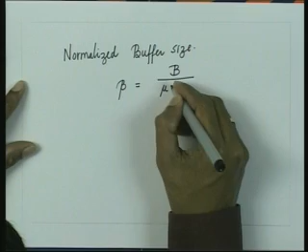So let us define the window evolution. Let us define the normalized buffer size beta, defined to be B upon mu tau plus 1. So this is the normalized buffer size.

Let us define T to be equal to tau plus 1 upon mu. So this is the propagation delay, and this is the service time. So this is the total round trip time. T therefore denotes the round trip time. So this I can write to be B upon mu T, where mu is the service rate and T is the round trip time.

So this is the delay, and this is the bandwidth. So if beta is less than or equal to 1, that means we have the case of a large bandwidth delay product.

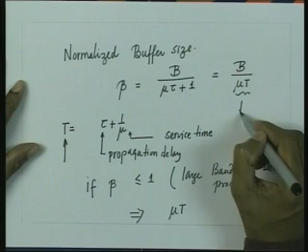Essentially it means that the bandwidth delay product, this mu T, is greater than or equal to the bottleneck buffer size. We would like to analyze the throughput characteristics of a TCP source in networks having large bandwidth delay products. By large bandwidth delay products, we mean that the product of the bandwidth into the delay, where the delay is the sum of the propagation delays plus the service time, is greater than or equal to the buffer size, that is, greater than the bottleneck buffer capacity.

Now let us try to analyze such networks which are having large bandwidth delay products.

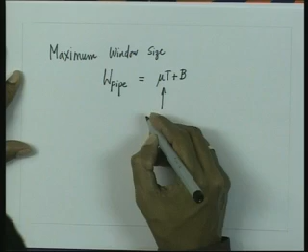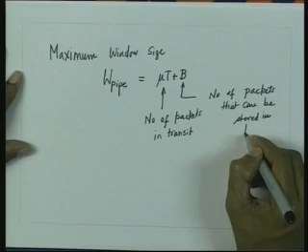Now the maximum window size that can be there, we call it W pipe, the maximum window size, or W max, will be mu T plus B. This many number of packets can be in transit, and these many number of packets can be stored in the buffer. So this is the maximum window size in the network. That is, the maximum window size denotes the maximum number of unacknowledged packets that can be there in the network, which equals the number of packets in transit plus the number of packets queued up in the buffer. So mu T plus B indicates the maximum number of unacknowledged packets that can be there in the network, and therefore by definition it will be the maximum window size.

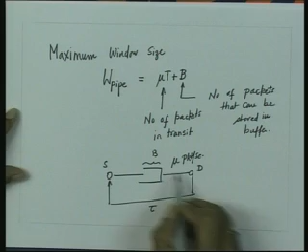Now let us try to see how the window evolution takes place during the slow start phase; things will become clearer. The situation is something like this: there is a source, a bottleneck buffer of size B serving at a rate of mu packets per second, with a propagation delay of tau, serving packets toward the destination with propagation delay tau. This model is a very simplified model of the TCP connection between a source and a destination in a large bandwidth network.

Our assumption is that the source always has data to send, so it is an infinite data source. The propagation delay is assumed to be constant; usually in practice it may not be, but here it's assumed constant. There is only one single bottleneck node, and that node has a capacity of holding B packets, with a service rate of mu packets per second. Now let us try to see how the window evolution takes place during the slow start phase.

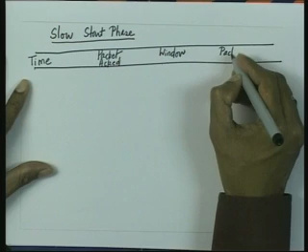Now the window evolution that takes place in the slow start phase is something like this: we track time, the packet which has been ACKed, window size, packet number, and queue length. At time 0, window size is 1 in the slow start phase.

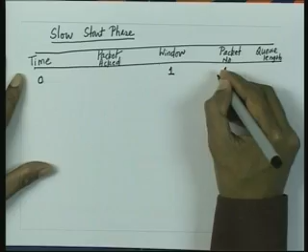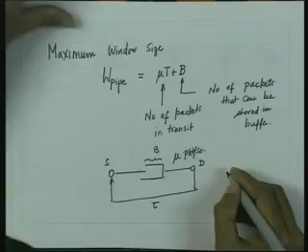So we release packet number 1, and the queue length shows that packet going into the buffer and sitting there, so queue length becomes 1. After t time units, at time t, note that this t consists of tau plus 1 upon mu, that is, the propagation delay plus the service time. So when packet 1 has been released here, after time t, the packet that gets acknowledged will be packet number 1, and when this packet is acknowledged, the window size becomes 2. Then we release packets 2 and 3, and these two packets go into the buffer and sit there.

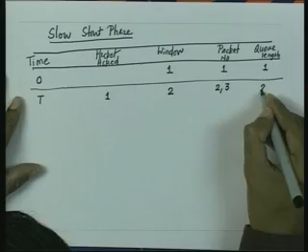So what is happening during the slow start phase? Initially we start from window size equal to 1. We release that packet. When that packet's acknowledgement comes back after a round trip time, denoted by capital T, the window size now doubles, becoming 2. For every acknowledgement, the window size increases by 1 in the slow start phase. So when this packet's acknowledgement comes back, the window size becomes 2, and we release the 2 packets, which go and sit into the buffer.

Now if you see packet number 2, which was released earlier, when that gets serviced after a time interval of t, that means at time 2t, the packet which gets acknowledged is packet 2. Now when this packet comes here, packet 3 actually starts getting service.

So the window size now becomes, when packet number 2 has been acknowledged, the window size becomes 3. Already 3 is there in transit, and therefore we can now release packet number 4 and 5, and since 3 is there in transit, these two packets will go and sit in the buffer, and therefore the queue length is again 2.

Now the acknowledgement for packet number 3 will come back to the source after another interval of 1 upon mu, because the difference between 2 and 3 will be 1 upon mu, where 1 upon mu is the service time. The packet that gets acknowledged is 3, and when that happens, the window size becomes 4.

Now when the window size becomes 4, at this point when 3 was in transit, packet number 4 was getting served, and since the window size is 4, packet number 5 is already there in the buffer, so we can release packet number 6 and 7. So 5, 6, 7 will be there in the queue, so the queue length is 3, and 4 will be there in transit, and therefore the total window size is 4, which indicates the maximum number of unacknowledged data that can be in transit.

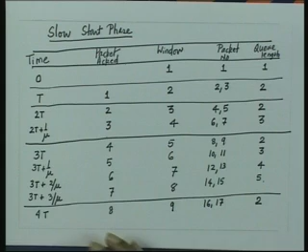So you can see here at time 4t, the acknowledgement for 8 comes, the window size becomes 9, and you will release packet number 16 and 17. So the window size is 9, the acknowledgement for packet number 8 has come, and note that all the packets, that is 9, 10, 11, 12, 13, 14, they are all in transit, and therefore the queue length again will be 2. So this illustrates the exponential nature of the window evolution.

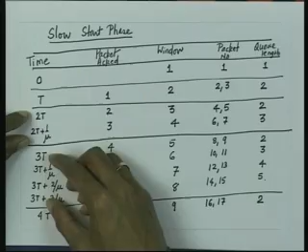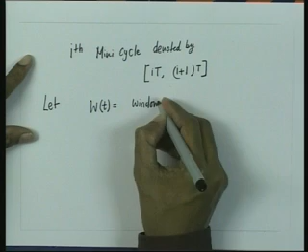Now let us define each of these intervals, t and this interval and this interval, to be the minicycles. So we define the ith minicycle to be denoted by i into t. Now let us say that W(t) denotes the window evolution, the window size at time t. Now if you observe the behavior here, this is the first minicycle, the second minicycle, the third minicycle, the fourth minicycle, and so on.

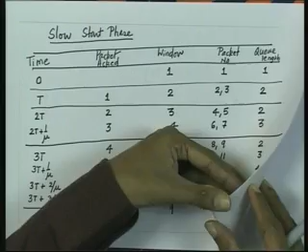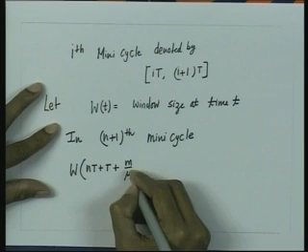So if you see that in the n plus 1th minicycle, the window size W at nt plus t plus m by mu is given by 2 raised to power n plus m plus 1, for m lying between 0 and 2 raised to power n minus 1.

Or in other words, if you see in the nth minicycle, it will be W at nt plus m by mu, which will be equal to 2 raised to power n minus 1 plus m plus 1, for m lying between 0 and 2 raised to power n minus 1.

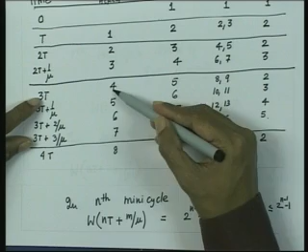So as you can see here, let us say n is equal to 3, and if m is 0, the window size is 3 minus 1, 2 raised to power 2, that is 4, plus 1, that is 5. If you take 3t plus 1 by mu, that is m is 1, then it becomes equal to 5 plus 1, that is 6, and so on.

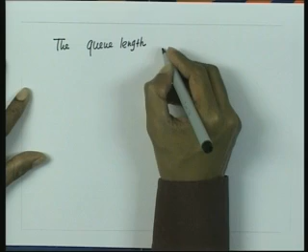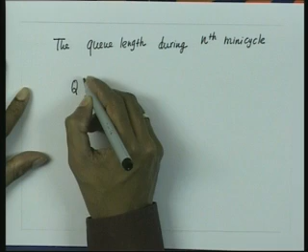This way you can determine what will be the window size at the nth minicycle. Similarly, the queue length during the nth minicycle is given by Q of nt plus m by mu, which will be equal to m plus 2, for m lying between 0 to 2 raised to power n minus 1. So this is the queue length.

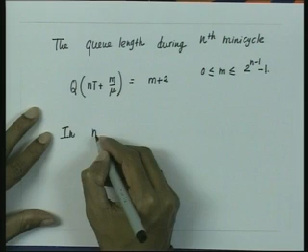Now if you see from here, in the nth minicycle the maximum window size will be when m achieves a value of 2 raised to power n minus 1, and that will be 2 raised to power n. So in the nth minicycle, the maximum window size W max will be equal to 2 raised to power n.

Similarly, the maximum queue length, Q max, if you put m is equal to 2 raised to power n minus 1, we will have 2 raised to power n minus 1 minus 1 plus 2, which is equal to 2 raised to power n minus 1 plus 1, which we can approximate to be equal to 2 raised to power n minus 1.

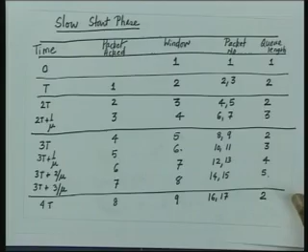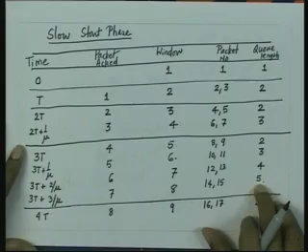So you see that Q max is approximately equal to W max by 2, the Q max is approximately half of the maximum window size, which will become clearer from this example. As you can see, the maximum window size in this minicycle is 8, and half of 8 is 4, which is approximately equal to the maximum queue length, which is actually here 5.

So as we have seen, during the slow start phase the window increases in an exponential fashion, and we can write an expression for the window size evolution as well as the queue length evolution. We have also seen that the maximum queue size will be approximately equal to half of the maximum window size in the nth minicycle.

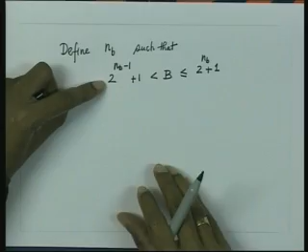Now let us define a variable called NB, such that 2 raised to power NB minus 1 plus 1 is less than B, that is B is the buffer size, but B itself is less than or equal to 2 raised to power NB plus 1. So we choose an NB such that 2 raised to power NB plus 1 is greater than or equal to the buffer size, but 2 raised to power NB minus 1 plus 1 is less than the buffer size.

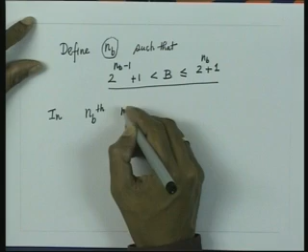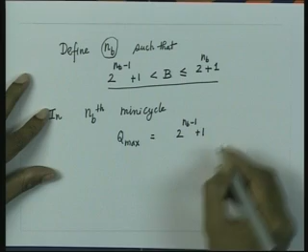So we have chosen some number NB such that this relationship holds good. Now in the NBth minicycle, what will be the Q max? If you see from our expression for Q max, the maximum queue length will be equal to 2 raised to power NB minus 1 plus 1, but since this is less than B, no buffer overflow will take place.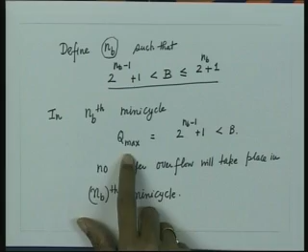In the NBth minicycle, what we are saying is choose some number NB such that 2 raised to power NB minus 1 plus 1, the buffer size B lies between these two quantities. So if you take the NBth minicycle, we know that the maximum Q length will reach 2 raised to power NB minus 1 plus 1. Since by our assumption this quantity is less than the buffer size, no buffer overflow will take place in the NBth minicycle.

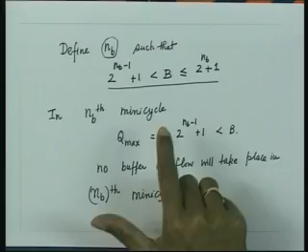However, since 2 raised to power NB plus 1, which is going to be the maximum Q length in the NB plus 1th minicycle, is greater than or equal to B, buffer overflow can occur in the NB plus 1th minicycle. Since 2 raised to power NB plus 1, which is equal to Q max in the NB plus 1th minicycle, is greater than or equal to B, buffer overflow will occur in the NB plus 1th minicycle.

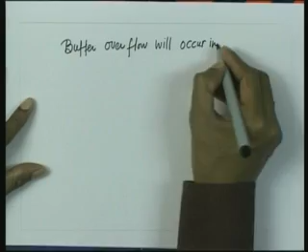Now the question is that the maximum Q length in the NB plus 1th mini cycle is greater than or equal to B. That is the maximum Q length, but the buffer can fall short of the Q length somewhere in between during the NB plus 1th mini cycle. So we need to determine at what point the Q length exceeds the maximum buffer size, for which value of M the Q length will exceed the buffer size during this cycle.

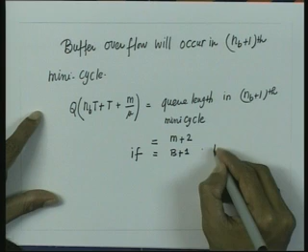This is the Q length at the NB plus 1th mini cycle, and in general it's given by an expression for M plus 2. Whenever that becomes equal to B plus 1, buffer overflow will occur. Therefore, M should be equal to B minus 1. At this point, M equal to B minus 1, the buffer overflow occurs.

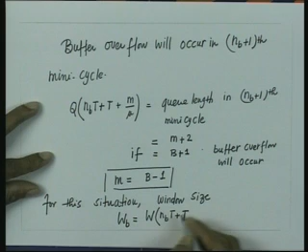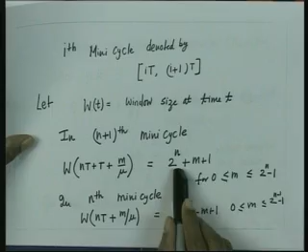So for this situation, the window size, call it WB, is given by W of NBT plus T plus M by mu. If I keep M equal to B minus 1, this becomes equal to 2 raised to power NB plus M plus 1, which becomes 2 raised to power NB plus B. From the expression for window size variations in the NB plus 1th mini cycle, given by 2 raised to power N plus M plus 1, we get 2 raised to power NB plus M plus 1, which equals 2 raised to power NB plus B.

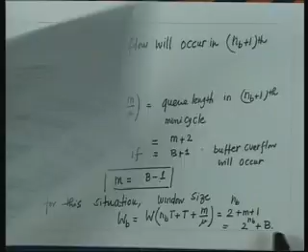Now, since by definition our buffer B is less than or equal to 2 raised to power NB plus 1, and B is greater than 2 raised to power NB minus 1 plus 1, we can approximate WB to be equal to 2B.

Now note what is happening: the window evolution during the slow start phase is exponential. We have argued that the buffer will overflow in the NB plus 1th mini cycle if the Q length exceeds the buffer size, and the window size reaches approximately equal to 2B. So when the window size reaches approximately equal to 2B, the buffer overflow will occur.

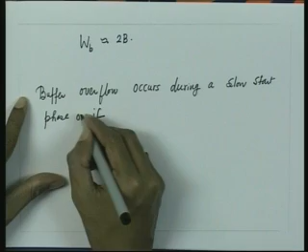Now, for this to happen, the buffer overflow should occur in the slow start phase, this maximum window size W should be less than or equal to the slow start threshold, because if not, the slow start threshold itself would have already passed. So the buffer overflow occurs during a slow start phase only if WB is less than or equal to WT, which is the slow start threshold.

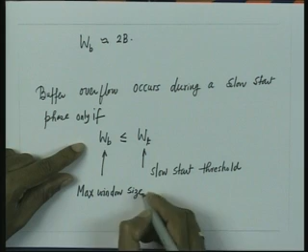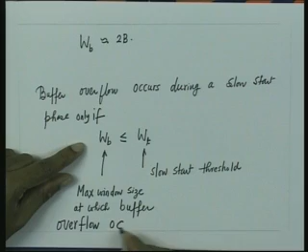WB is the max window size at which buffer overflow occurs. So if this window size WB is less than or equal to the slow start threshold, then only the buffer overflow will occur during the slow start phase. At least what we are trying to say is that a slow start phase should last. Now the question is how we have chosen the slow start threshold, that is WT.

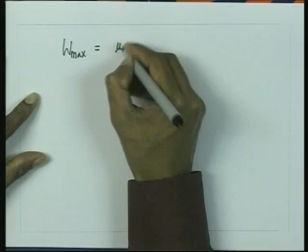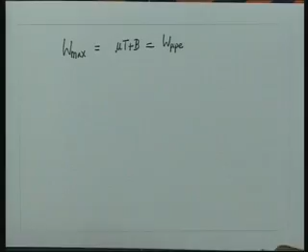Let us see how we have chosen WT. Note that the maximum window size that can be there, W max, can be mu t plus B. This was our W pipe, because this is the bottleneck buffer size, so this denotes the maximum number of packets that can be there in the buffer, and mu t denotes the maximum number of packets that can be there in transit. Therefore mu t plus B is the maximum window size that can be there for this source destination pair, which has a single bottleneck node with a link capacity of mu and a buffer size of B. So mu t plus B is the maximum window size for this source destination pair.

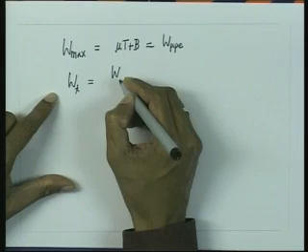So this is the maximum window size, and typically we set the slow start threshold WT to be half of this, that is W pipe by 2, which we keep equal to mu t plus B by 2, and this denotes to be equal to 1 plus beta mu t upon 2, which if we write this expression in terms of beta: now WB we have written to be equal to 2B, which we can approximate to be equal to 2 times beta into mu t.

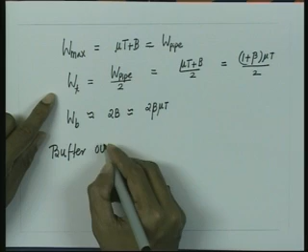That means a buffer overflow will occur during a slow start phase if twice of beta mu t is less than or equal to 1 plus beta mu t by 2, which implies that beta should be less than or equal to 1 by 3. So what this is trying to say is that if beta, the normalized buffer size, is less than or equal to 0.33, then buffer overflow can occur during a slow start phase. That means the packet can be lost during the slow start phase.

Now, if the packet is lost during the slow start phase, two things happen. Whenever the source detects that a packet loss has occurred, it drops the window size to w equal to 1 and enters into another slow start phase. Now when it enters into another slow start phase, this time the slow start threshold variable will not be the original one used in the previous slow start phase. It will be half of that, because whenever you detect a packet loss, you set your slow start threshold variable equal to half of the window size at which the packet loss was detected.

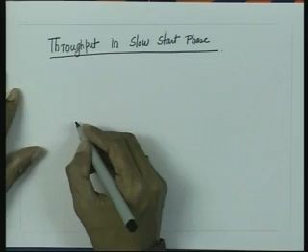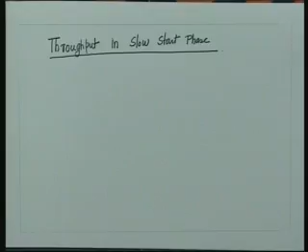In this case we consider two cases. In case 1, we assume that no buffer overflow occurs during the slow start phase. If no buffer overflow occurs, that means Wb, at which a buffer overflow can occur, should be greater than the slow start threshold variable. If it is greater than the slow start threshold variable, then our window size increases to the slow start threshold, and after that the TCP enters into the congestion avoidance phase. So in that clean slow start phase, there is no buffer overflow.

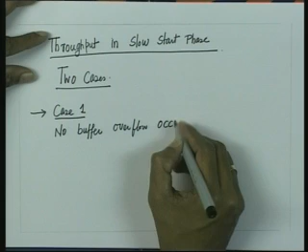Another case we consider is where the buffer overflow occurs during the slow start phase. So we consider two cases. Case 1: we consider that no buffer overflow occurs during the slow start phase. That means this case corresponds to the situation of WB greater than WT.

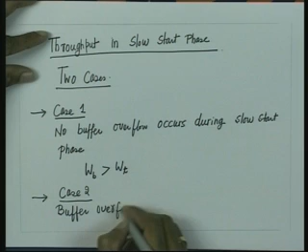Case 2: we assume that buffer overflow occurs during the slow start phase. That means WB is less than or equal to WT. Now, in the case 2 situation where the buffer overflow occurs during the slow start phase, there will be two slow start phases. We need to consider two slow start phases.

In one slow start phase, what happens? Our window size increases to WB, at which the buffer overflow occurs. The window drops to W equal to 1 and again enters the slow start phase. But this time it will not go to WT as before; it will go to a different WT, equal to half of the window size at which the packet loss was detected.

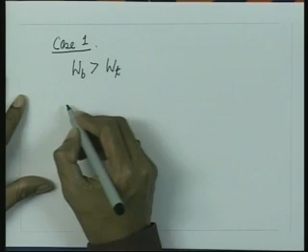Now let us try to determine throughputs of the slow start phase in both cases. So we consider case 1 first: WB is greater than the slow start threshold. In this case, the slow start phase ends when the window size reaches WT.

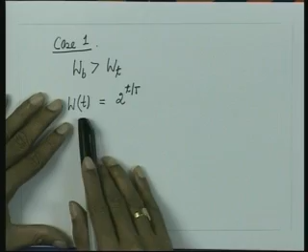Now we will approximate the window evolution during the slow start phase to be equal to 2 raised to power t by tau. Note that the window is actually increasing in a discrete fashion, as we had seen, given by W in the nth mini cycle, W(n, tau) plus m by mu, by this expression. Now we can have a continuous time approximation of this, and say that the window evolution is given by W(t) equal to 2 raised to power t by tau.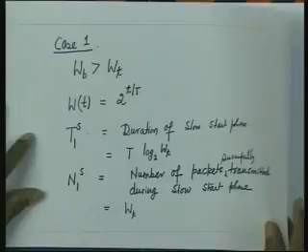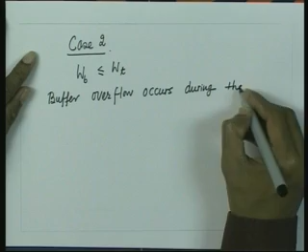Now we consider case 2, when WB is less than or equal to WT, so buffer overflow occurs. Buffer overflow occurs during the slow start phase, and this is followed by another slow start phase.

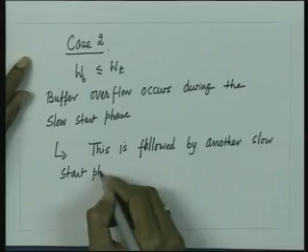The buffer overflow which occurs during the first slow start phase will be followed by another slow start phase. Now let us try to analyze the throughputs in both phases. First we will consider the first phase.

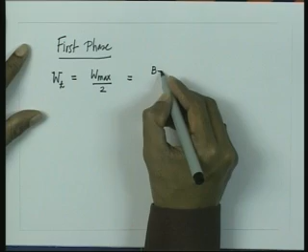In this case, we assume that the threshold, which we have kept equal to W max by 2, and that we have kept equal to B plus mu T by 2. Now when the window reaches WT, that is the slow start threshold, when it reaches WB, that is the window size at which the buffer overflow occurs.

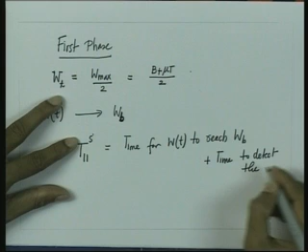So now let us determine the time to reach, I call it T11s, the time for W(t) to reach window size WB at which point the buffer overflow occurs, plus the time to detect the packet loss. This will be the duration of the slow start phase, specifically the duration of the first phase of this slow start phase.

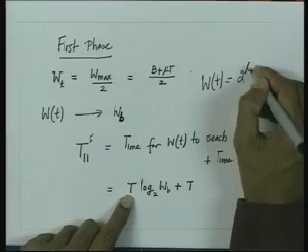This is given by T of log WB plus T. By following the same evolution, WT is equal to 2 raised to power T by T. So the time it takes for WT to reach WB will be equal to T into log of WB, plus it takes another round trip time to detect the packet loss, so we add another T. As a result, this time is given by log of WB plus 1.

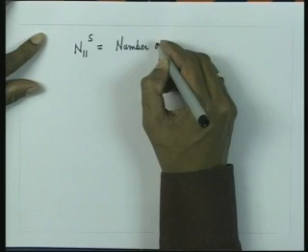Now again, the window size has reached up to WB. The window size is WB, so the total number of packets which have been successfully transmitted can again be approximated by WB. So let us denote N11s to be equal to the number of packets successfully transmitted, and this is given by WB.

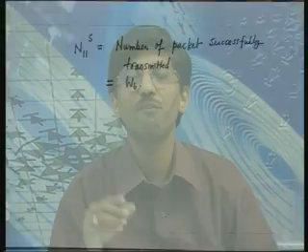So what we are saying is that we are assuming a condition where the buffer overflow occurs during the slow start phase. This is the first phase of the slow start phase. Now the packet loss is detected, and when it is detected, the window will drop to W by 1 and another slow start phase begins. So now let us consider the second phase.

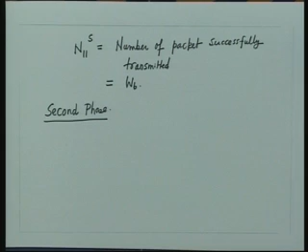In the second phase, note that the slow start threshold variable WT, which was earlier set in the initial condition equal to W max by 2, will not be that. It will instead be set equal to half of the window size at which the packet loss was detected. It can be shown that the window size at which the packet loss was detected...

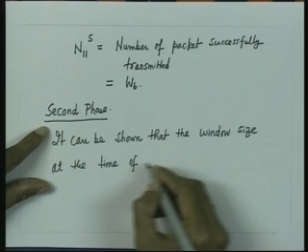The window size at the time of packet loss detection is actually given by the minimum of 2WB minus 2 into the original WT that was there. So the new WT will be set equal to minimum of WB minus 1 into WT by 2. And what was WT by 2? It was W max by 2, so that will actually be equal to the minimum of WB minus 1 into W max by 4. Now we will determine that.

So now when the window size reaches this new WT, the slow start phase ends and a congestion avoidance phase begins. We will now determine how much time it takes for the source to remain in this phase, and the number of packets that it has successfully transmitted.

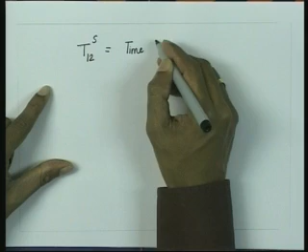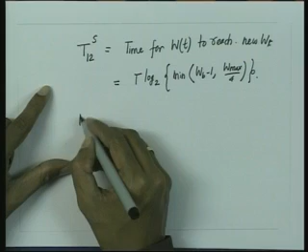In our case, this will be given by T12s, equal to the time for W(t) to reach this new slow start threshold, given by T of log of the new slow start threshold, which is minimum of WB minus 1 and W max by 4. And the number of packets successfully transmitted, N12, is given by the window equal to...

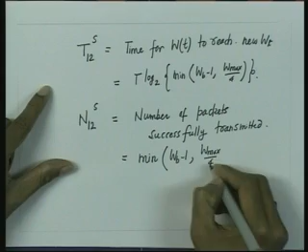So therefore we got two phases. We can determine how much is the time for the slow start phase cycle, and we can also determine how much is the maximum number of packets that has been transmitted during this slow start phase. From this we can determine the throughput for the slow start phase. Now we will go into determining the throughput for the congestion avoidance phase.